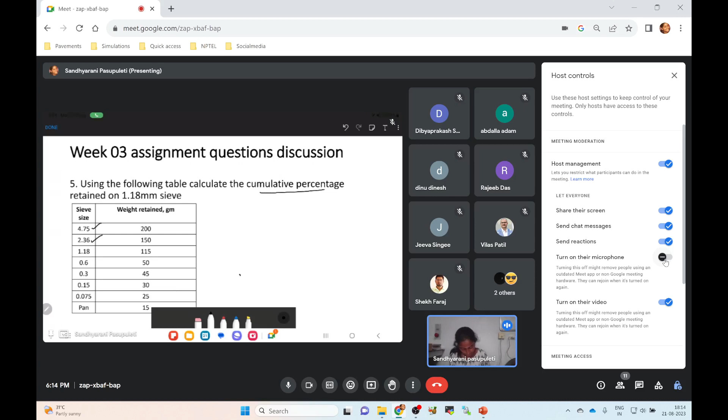If you see the fifth question, this is also a very easy question. Using the following table, calculate the cumulative percentage retained on the 1.18 sieve. So you can see the weight retained on each sieve size is given. We need to calculate the cumulative percentage retained on the 1.18 sieve. So these weights are already given.

Cumulative, how do we get it? For weights retained, 200 is the weight retained. So on 2.36, you know that 200 plus 150 will be 350. On 1.18, it will be the sum of all the weights retained from the top. In the same way, you can calculate the cumulative weights retained.

If you want to calculate the percentage, how do we calculate it? You have to calculate the total weight retained. Then this is the cumulative weight retained. So 200 by the total, 350 by 630. In a similar way you can calculate the cumulative percentages retained. They are asking for the cumulative percentage retained on the 1.18 sieve, which is 73.8%.

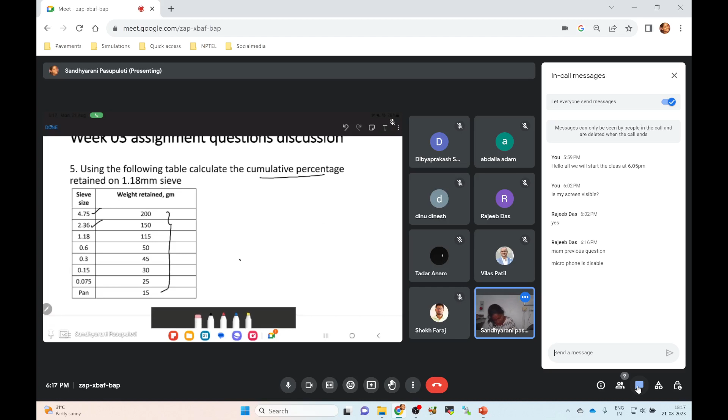So if you can see here, weight retained on 4.75 is given as 200. So cumulative will be 200 only because there is no weight other than 200. If we come to the 2.36, weight retained is 150. So whatever is retained on 2.36 is 150 plus whatever is retained on 4.75, this also will retain on 2.36. So cumulative would be 200 plus 150, 350.

In the similar way, you can do that. The weight retained on 1.18 will be 200 plus 150 plus 115, which is nothing but 465. So if you know the cumulative weights retained, now you have to calculate what is the percentage of cumulative retained. So if you could see, let me erase this.

Okay, to calculate the cumulative retained, let us say here the cumulative retained is 200 divided by the total weight retained, 630, into 100. So this is your 31.7%. In the same way, if you come to the 1.18, what is the cumulative retained? 465 out of 630 into 100, which is nothing but 73.8%.

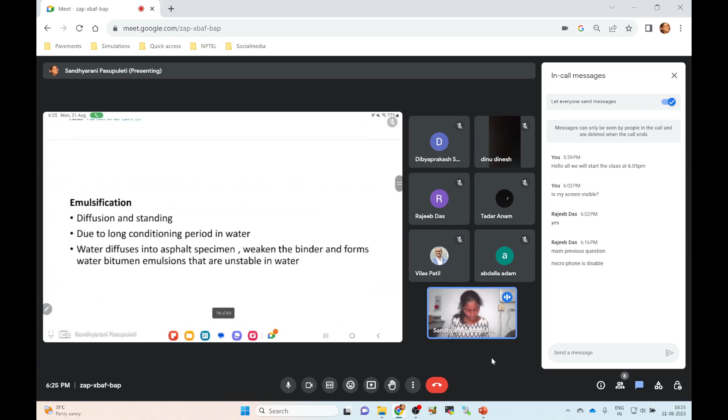And if you take emulsification, let us say this aggregate and bitumen has already been water saturated for so long. So diffusion has already happened and still the pavement is inside the water. Due to the long conditioning period in water, water diffuses into the asphalt specimen. Then it will weaken the binder and form water-bitumen emulsions, which are unstable in water. What is an emulsion usually?

Let us say you have bitumen which is semi-solid in state. If you want to make this semi-solid bitumen a liquid, you will call that an emulsion. Usually how will the bitumen convert to liquid? First, you can increase the temperature so that this semi-solid bitumen is converted into liquid. Instead of increasing the temperature, by adding some liquids you can convert the bitumen into a liquid. Then the bitumen is called an emulsion.

So here what they are saying is, because the bitumen is already saturated within the water for so long, it forms a bitumen emulsion within the water. It is kind of floating in the water. Bitumen in small particles will be floating in the water and the bond with the aggregates will be broken.

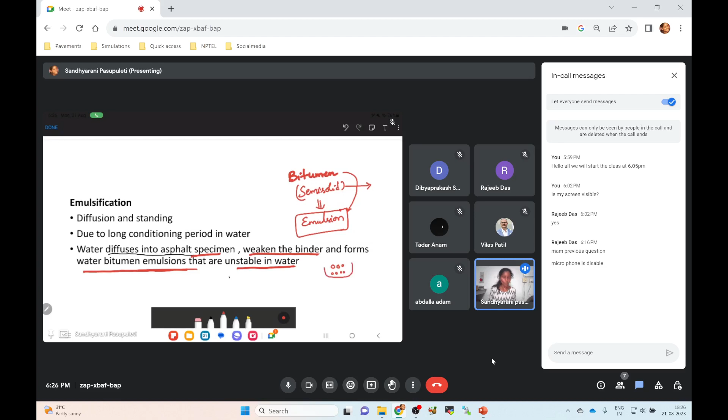So these are two of the mechanisms, and if you take the third mechanism, which is hydraulic scouring, let us say a pavement is already saturated with water. When I say pavement, these are the aggregates, and in between the aggregates there is bitumen. This is the pavement, and it is fully saturated with water. Now there is a vehicle moving over it. That means this vehicle is applying load over the saturated surface.

So what happens when it applies pressure? It can cause some abrasion of the binder from the aggregates and also cause fine aggregates to become loose and dislodged from the pavement. Whatever fine aggregates are here can be dislodged from this compacted surface, or some of the bitumen can be abraded from the mixture. This is due to the applied pressure from the traffic load on the saturated pavement surface. This mechanism is called hydraulic scouring.

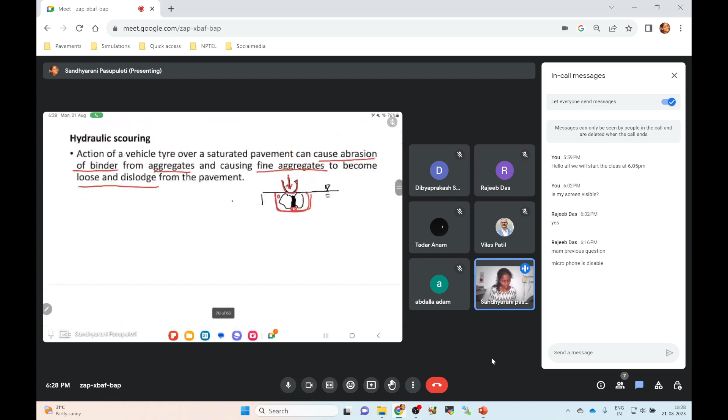There can be another mechanism, which is due to pore pressure. Let us say now I have applied only one wheel load, but there are repeated tire loads from morning to evening. Due to these repeated tire loads, what happens on saturated pavements? Let us say this is the pavement, already saturated, and you are applying a repeated load.

There are aggregates on the sides and at the bottom there will be a subgrade. It is under pressure from the sides and you are also applying load from the top. This internal pressure can cause too much pore pressure and erode the material and bitumen due to the water. This is due to pore pressure. Now let us see what was being asked in the question.

Suction means what? When the load is applied here, let us say higher pressure at the top, lower pressure at the bottom. So the suction is created at the bottom. So this is what is causing the loss of the bitumen from the aggregate. So this mechanism is not displacement and detachment, we know, because there is a moving wheel.

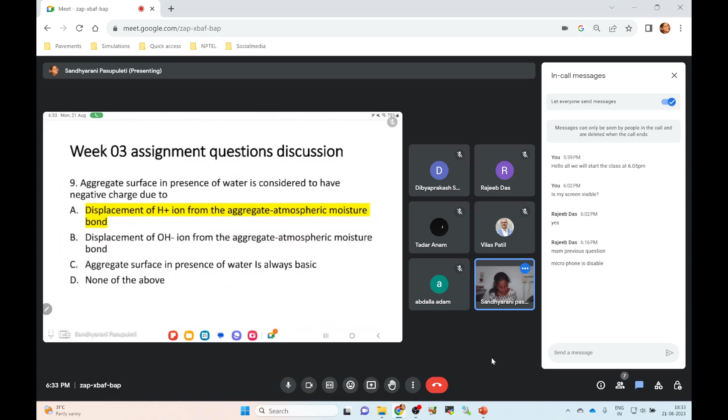Aggregate surface in presence of water is always basic. Definitely not this and not this. So it can be either option A or option B, displacement of H plus ion from the aggregate or the displacement of OH. So you have already seen from the silanol group SiOH, H plus has been taken out, because of which you are getting SiO minus, which is nothing but the negative charge on the aggregate.

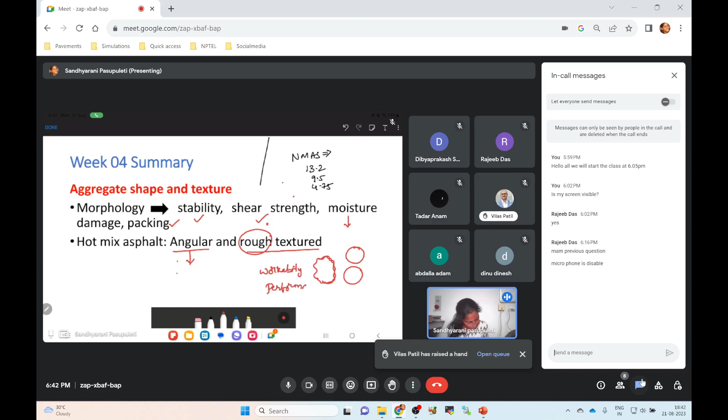But as far as workability is concerned, workability means when I am mixing the aggregate with the bitumen, I should not require more energy to mix. It should be very easy to mix. But with very rough textured aggregates, it is difficult to mix; we need to give more energy. That is the reason why rounded aggregates are suitable for good workability, and rough aggregates are more suitable against moisture damage. But if you choose between workability and the performance of the pavement, we always go for performance. That is why sometimes we compromise on workability and still choose angular and rough textured aggregates.

Okay, if you see the angular aggregates, they give better interlocking, more internal friction and more stability. But if you take the rough textured aggregates, there will be more adhesion. When I say adhesion, that is the bond between aggregate and bitumen. So as far as workability is concerned, angular aggregates have more energy requirement and rounded aggregates have less energy requirement.

But what happens when the rounded aggregates are used? It requires less energy, so with whatever less energy, it gets compacted well. Initially, intentionally, we keep, let us say, 7% of air voids in the pavement, so that when the vehicles start moving, they themselves will be compacting, which is called primary compaction. And after a particular number of years, there will be secondary compaction due to the vehicles.

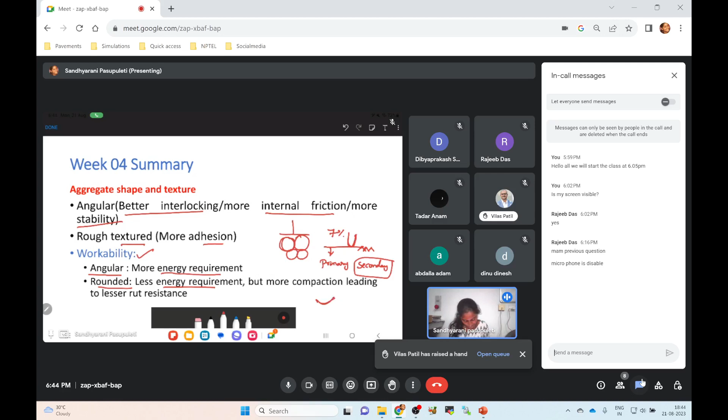But if we use the rounded aggregates, in the initial stages of the pavement itself, it will be in secondary compaction because it has been compacted well. If it is already in secondary compaction, the moment a heavier vehicle load comes, what happens? It will show rutting on the pavement surface. That is one of the reasons why we avoid using rounded aggregates in pavement construction.

And if we consider the dense graded mixes, here I have shown one photo which is BC2 gradation. These are the sizes used in the BC2 gradation, and this is the individual percentage retained. There is nothing retained on 19 mm, but on 13.2 you can see 5% is retained, and on 9.5 something like 16, 17; you can see the values here. But SMA is nothing but a gap graded mixture.

So the difference between SMA and BC2 you can observe is, in BC2 most of the fine particles, let us say less than 4.75, 2.36, 1.18, 600, 300, 150, 75 micron, and the dust, all the percentages are retained. That means you are including all these sizes of materials. But if you come here, a few of the finer sizes will be missing. In addition to that, most of the aggregate contribution is from the coarser aggregates.

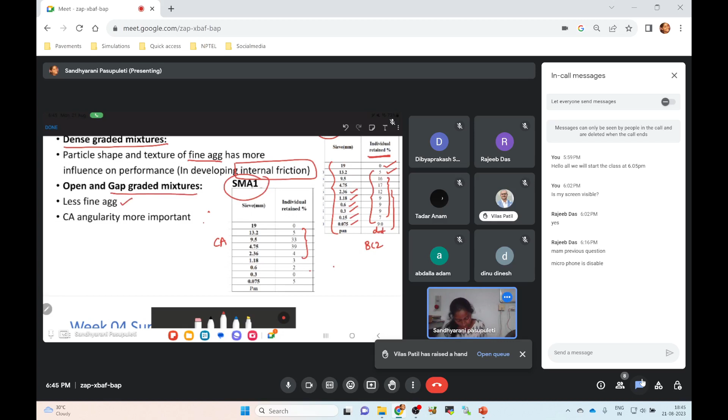So if you want to talk about gap graded mixtures, the angularity of coarse aggregates is sufficient. If you want to talk about dense graded mixes like BC2 or BC1, then you need to think about fine aggregate angularity. So for dense graded, fine aggregate angularity is more important because their amount is more, thereby they develop more internal friction. For open and gap graded mixtures, fewer fine aggregates and more coarse aggregates are there, so the angularity of coarse aggregates is more important.

Though we do not have particular methods to determine the angularity of fine aggregates in India, for coarse aggregates we do have the methods. In addition to that, one of the most important tests is shape characteristics, flakiness and elongation. This test might be very easy to perform, but if we have more flaky and elongated particles in the mixtures, it really changes all your volumetrics, your optimum bitumen content, and your performance in the field will be completely different from the lab.

So for flakiness index, you can see here there are two apparatus. This is used to determine the flakiness. When I say flaky, if we have an aggregate like this, how flat it is. This is the length; when I say flat, the thickness, how thin it is. We do not want the metal to be very thin because if they are very thin, they will be broken. So we try to pass them through this gap. If they pass through this gap from top to bottom, they are very thin. These are the slots provided to check, each slot for each size.

Let us say this slot will be written as 63 to 50. That means the thickness T will be (63 plus 50) by 2 into 0.6, as I mentioned, 0.6 times the average size. In this slot, if your individual aggregate is passing, you can say my aggregate is very flat, very thin. Like that, we have to separate all the aggregates corresponding to their sizes, then pass them through this. Whatever is passing, we call flaky aggregates. Whatever is not passing, we call non-flaky aggregates. So what is the problem with these flaky aggregates? Why can't I use them?

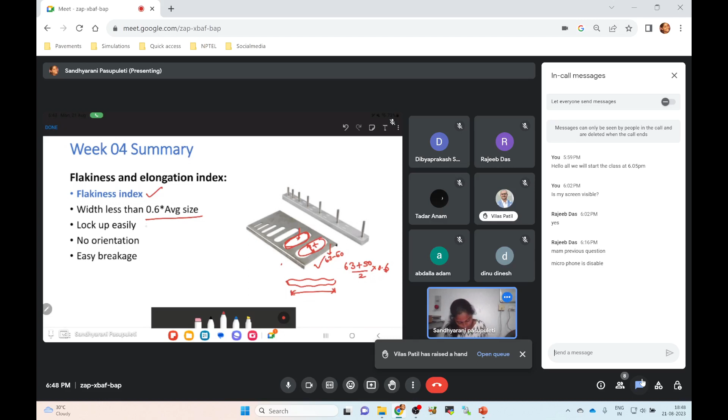First thing is, if I have 3-4 flaky aggregates, let us say mixed with bitumen, and now you have applied some vertical load from top. The moment you apply load, they just get compacted like that. They will not reorient or be dislocated. They will just compact as it is. They lock up very easily. There won't be any orientation.

But we need a better orientation to fill the gaps. Let us say you have a single aggregate here and it has 5 or 6 aggregates in contact. If a wheel load of, let us say, 20 kilonewtons comes from top, this load will be shared by 1, 2, 3, 4, 5, 6 aggregates. Because all these are in contact, the load can be shared by 6 aggregates. If there is no proper contact, this 20 kilonewtons should be shared by either 2 or 3. Then, because 3 aggregates are sharing more load, they will be broken very easily.

So having no orientation and locking up very easily is a main problem. In addition to that, because they are very flat and very thin, when the load is applied, they can be broken very easily. The same is the disadvantage for elongated materials also. You can see this is the elongation gauge. Here it will be written 63-50, and this length will be 1.8 into 63 plus 50 by 2. So we take each individual aggregate and try to place it here.

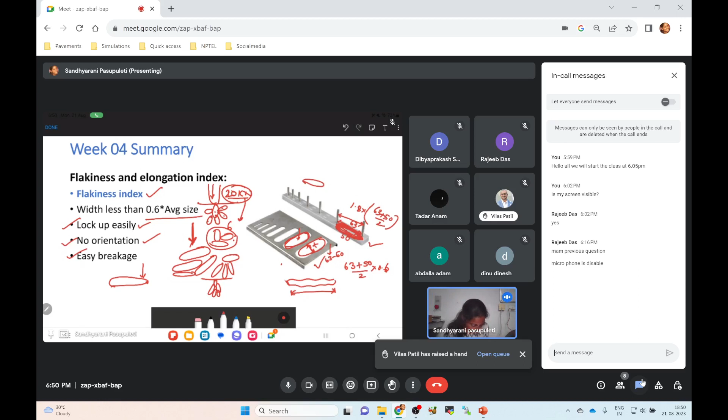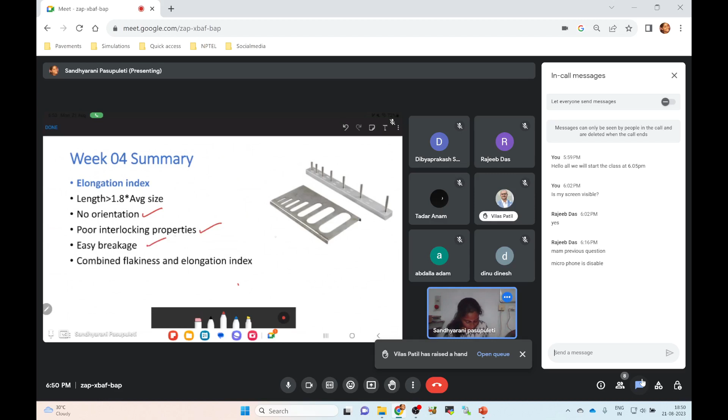If this aggregate is stopped here, that means its length is more than the slot provided. That means it is an elongated aggregate. We do not want the aggregates to be very long, because of the same disadvantage. They will not be oriented properly, they will lock up easily, and they will tend to break very easily. So this length would be greater than 1.8. No proper orientation, poor interlocking, easy breakage. So we calculate the flakiness index and elongation index separately, then we combine them and call that the combined flakiness and elongation index. This is what we do in India according to IS 2386.

But as far as the American standards are concerned, you can see here the aggregate. Any aggregate will have length, width and thickness. This is the length, this is the thickness and this is the width. Based on the ratio of width to thickness, length to width and length to thickness, by considering any two dimensions, you can calculate flat aggregates. If I have 200 pieces of aggregates, which are only flat, which are only elongated, or which are both flat and elongated can be determined.

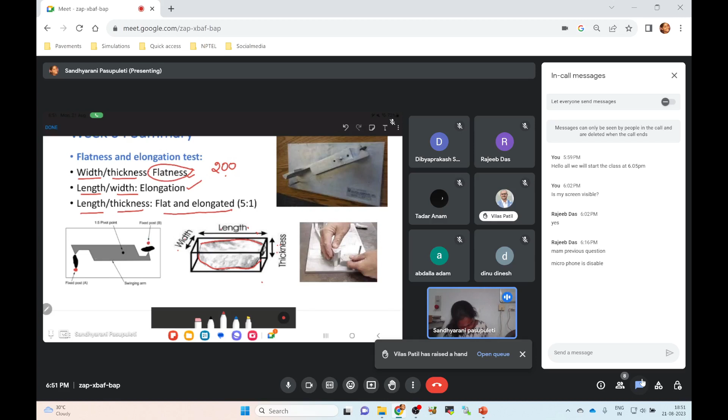How do we determine? This is the apparatus here. This is fixed, like a screw, and this is also a fixed screw. Here the gap would always be more, and here the gap will be small. Initially we take one aggregate. This is the length of the aggregate, so I keep my aggregate along the length side. This is a moving arm; you can move and rotate it. When you fix the length here, a particular gap will be formed.

Immediately, without disturbing this position, you take this aggregate out and try to pass it along the thickness direction. If it passes through, this aggregate is called both flat and elongated. So length to thickness is 5:1. That means if I have taken one aggregate whose length is 5 mm and thickness is 1 mm, the length is 5 times the thickness. Any aggregate having length 5 times the thickness is called both flat and elongated according to the American standards.

In that process you can still calculate only flat aggregates or only elongated aggregates, but this is one way to calculate both flat and elongated at a time. If you want to calculate only flat: here I have fixed along the length, right? Usually you should not fix along the length. You have to fix the aggregate along the width. So after fixing here along the width, let me erase this.

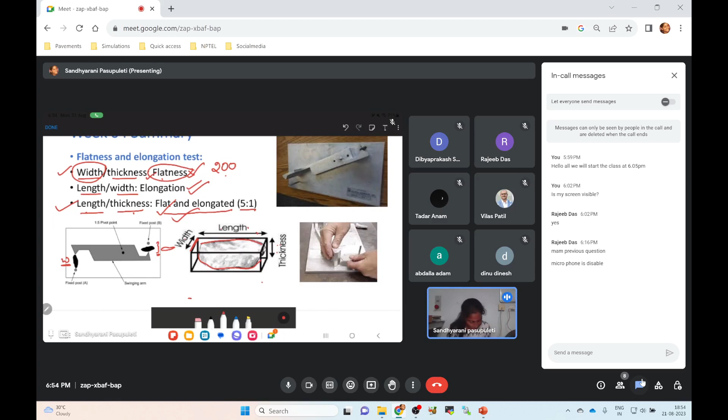So we will mostly not be doing this, but we still have this apparatus at IIT Kharagpur. We do it for laboratory purposes, but still in India, as far as the preliminary tests are concerned, we do it according to IS 2386 for flakiness and elongation.

And in addition to that, we have the angularity test. As we have discussed already, for dense graded mixes, the angularity requirement is different. For gap graded and open graded, angularity is different. How do we actually determine the angularity of any aggregates? One of the basic theories is, if you have rounded aggregates and you arrange them in any volume, that volume can be 200 cubic centimeters or 2000, whatever. Let us say I have a box here. I have filled the entire box with rounded aggregates.

Anytime you place rounded aggregates and fill, the amount of air voids or gaps formed by those rounded aggregates would always be 33%. So if your voids are more than 33%, let us say 35%, that means all of your aggregates are not rounded. There must be some aggregates which are not rounded. Let us say here the difference is 2%. That means there are extra air voids of 2%. That must be because of the angular aggregates present, because angular aggregates give more air voids than rounded aggregates.

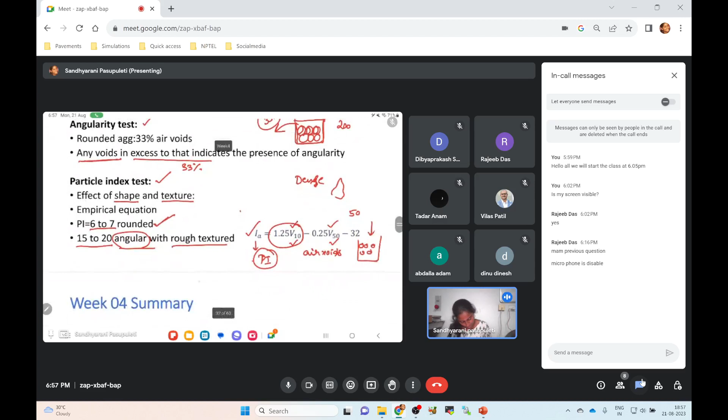So you can see the values here. What we can understand is, if the particle index value is 6 to 7, that means air voids are lesser, and lesser air voids means that is a rounded aggregate. If the particle index value increases to 15 to 20, that means more air voids are there. That means the aggregate could be angular or rough textured. So that's how, based on the particle index, we can say whether the given aggregates are round or angular.

Another important property of the aggregate is surface area. This surface area is always useful to calculate the bitumen film thickness. Why we need to understand the bitumen film thickness, we will understand when we move to volumetrics in upcoming lectures. Let us say you have already designed the mix, you have aggregate. Around this aggregate, there must be bitumen coated. This coating of bitumen is different in dense graded mixtures.

If you take the same aggregate in gap or open graded mixes, you can see there will be more thickness around the aggregate. The advantage of higher thickness is that when water comes into contact, it cannot break the bond between the aggregate and bitumen. Thereby moisture damage can be avoided. So to avoid moisture damage, we always prefer higher film thickness. But bitumen is not a cheap material, it is a costly material. So just because it gives higher moisture resistance, we cannot keep adding bitumen. We need to have a sufficient amount of bitumen.

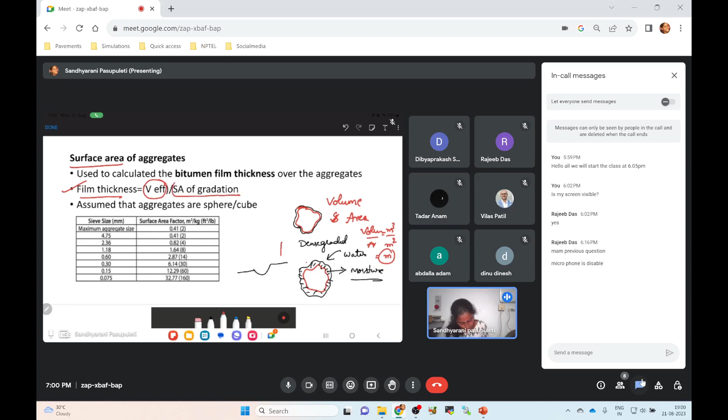So to calculate the film thickness, you need the volume of the bitumen. This volume is actually coated over the aggregate surface. So the surface area of aggregate is required, and the volume of bitumen that is being added. How to calculate this bitumen volume you will understand in the upcoming lectures. Let us say somebody has given the bitumen volume. Now you have to calculate the surface area of the aggregate. Then you can calculate the film thickness.

So you can see these are the set of surface area factors. How to calculate this surface area?

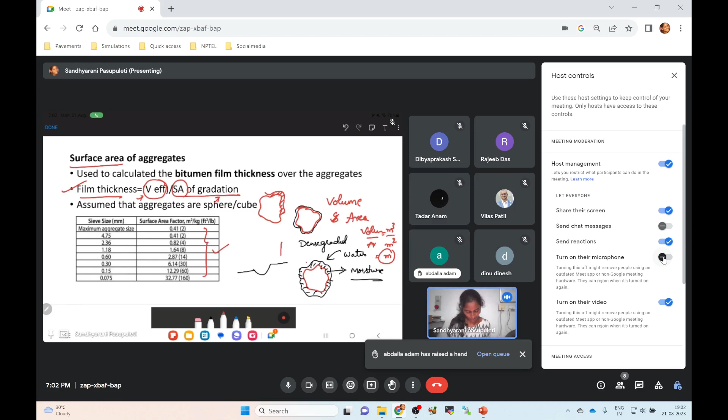So if you could see here, these are the surface area factors. I will explain what a surface area factor is and how to usually calculate it. As far as the surface area calculation is concerned, you need to know only the surface area of a sphere and a cube, because we assume that the aggregates are either spherical or cubical in shape.

So how to calculate the surface area factor: let us say now we have an individual aggregate. We know that specific gravity is density of the material by density of water. Let us say density of water is 1, so I am not considering it. So whatever is at the top will be density of the material. Density is nothing but weight by volume.

So if you want to calculate the surface area of an individual aggregate, when I say area, how do we get it? From the specific gravity, weight by volume. So let me bring this volume to this side. Then you have weight by specific gravity. Volume can be written as area into diameter, because we are assuming spherical or cubical. So weight by G. Now you need specific surface area, so weight by G into D. That is how you got this formula of weight by specific gravity into D. So this is for an individual aggregate.

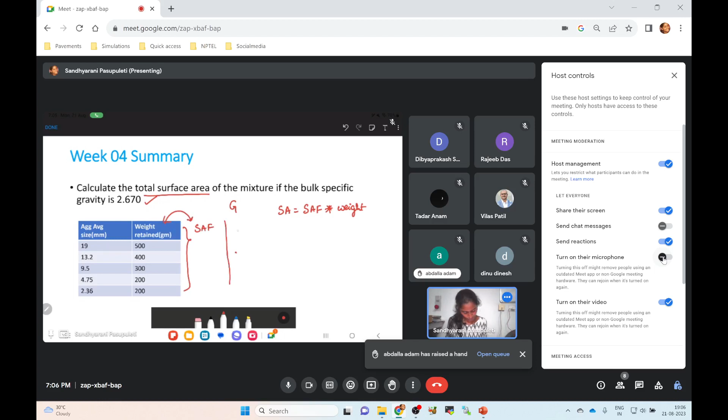So calculate the total surface area of the mixture if the bulk specific gravity is 2.670. So G has been given. To calculate the surface area, first you have to calculate the surface area factor, then you have to multiply it with the weight of the aggregates. The weight of the aggregates is already given. So first you need to calculate the surface area factor, then multiply these two. Then you will get the surface area of each aggregate. Then you can add all of them to get the total surface area.

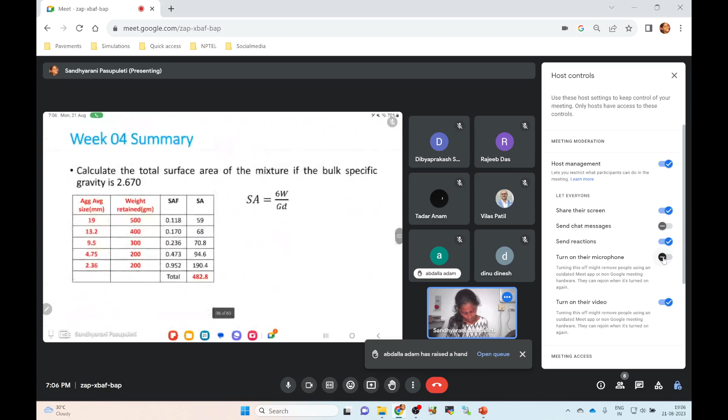Okay, you can see here. So how to calculate this surface area factor? This is already given. I have told this is meter square per kg. That means surface area of that particle out of the total kg. So from the previous equation, surface area is already known. So you can use the surface area of a sphere or cube, because for both of them the ratio will be the same.

Pi d square is the surface area. Pi d cube by 6 will be the volume. So this is the area by volume. So how much you will get? 6 by d. Okay. Pi will be cancelled. So this is 6 by d.

So now if you want meter square per kg. Okay. So from this specific gravity, you know weight by volume. So if you take the specific gravity to this side, volume equal to weight by specific gravity. Let me write specific gravity as G always, weight by G. So in this area by volume, instead of this volume, I will substitute this W by G. So you can take this to this side. Finally, you will get 6W by GD.

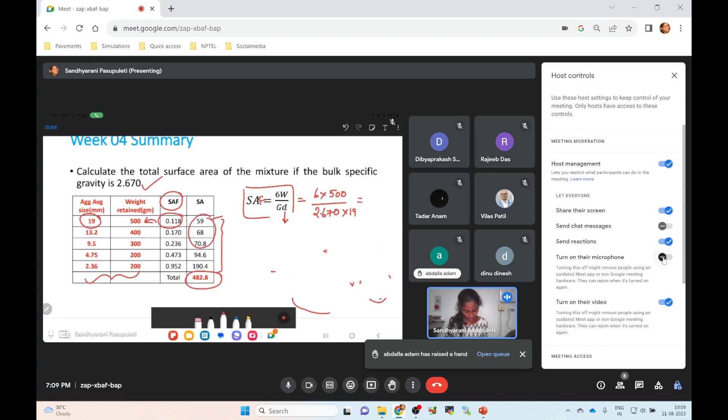6 into, what is the weight? 500, divided by G, which is given in the question, 2.670, into D, means size. What is the size? 19. So if you calculate that, you will get the surface area factor. You can multiply with this weight, you will get the total surface area. So if you calculate all the surface areas and add them, that is the total surface area. So in problems they may ask you to do it for 3 sizes or 2 sizes, they can give anything.

And the next important preliminary test is aggregate impact test. So when I say impact, I am applying a sudden load onto the pavement. It can be aggregate or a combination of aggregate or mixture, because here we are going to check the quality of aggregate. So when I apply the sudden impact load, that energy will be absorbed by the aggregates. Some aggregates will break into small pieces because they are not tough enough. If they are tough enough, they will not be broken into small pieces. So this impact test is to understand the toughness of the material and how resistant they are to degradation.

So what do we do? We take the aggregates passing 12.5 mm and retained on 10 mm. Then we apply 15 blows on that. After that you can see there are small pieces degraded. So you take the 2.36 mm sieve, and all these small pieces will be sieved. Whatever dust is there will pass. Whatever is bigger than 2.36 will be retained. So now we calculate this amount. Let us say I have taken 500 grams and 200 grams is passing, then 200 by 500 into 100. So 40% is my aggregate impact value.

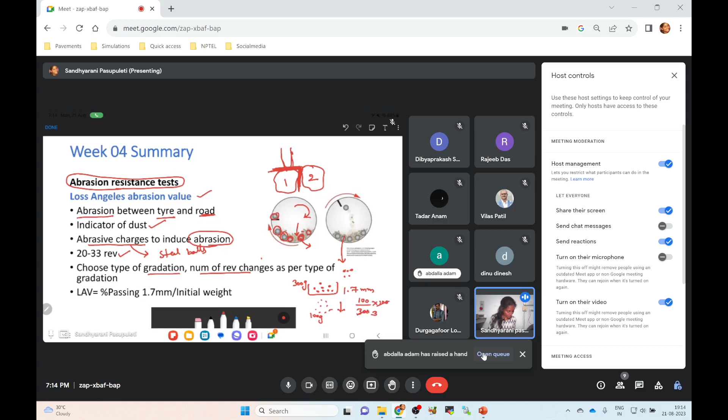Then what happens? After doing that, a lot of aggregate will become small pieces or dust. Then you take a 1.7 mm sieve, put all the material here and sieve. There will be some dust passing below. So let us say again, you have taken 300 grams and 100 grams has passed. That means 100 by 300 into 100, around 33% is your Los Angeles abrasion value. So here also we want the value to be as low as possible. Okay.

So if you have aggregates of different sizes with you, now you don't know on which sizes you have to perform this test. If you choose A, they tell you to choose a 40 mm sieve and a 25 mm sieve, and pass the material. So they should pass through 40 and they should be retained on 25. Like that you take around 1.2 kg.

In the same way, next time you take a 25 mm sieve and a 20 mm sieve, pass the material from 25, and some material will be retained on 20. Like that you collect around 1.2 kg. In the same way, 20 to 12.5, 12.5 to 10. So these four combinations of 1.2 kg each you take. Along with that, you add the steel balls. Then you do 20 to 33 revolutions per minute.

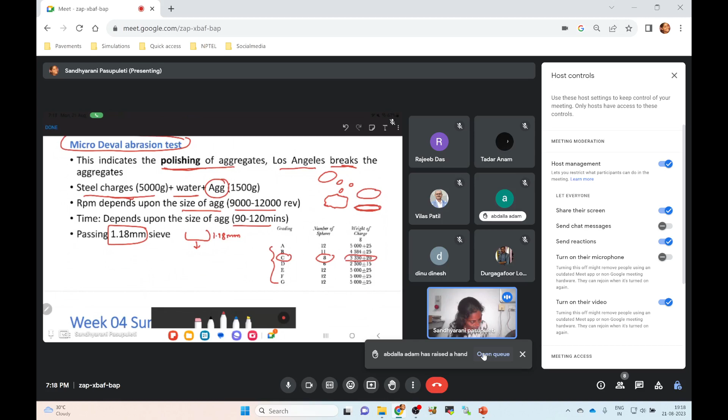And as I told, you have to select a type of gradation. If you select, let us say, gradation C, then you have to select 8 steel balls, and those 8 steel balls' weight will be around 3330 plus or minus 20.

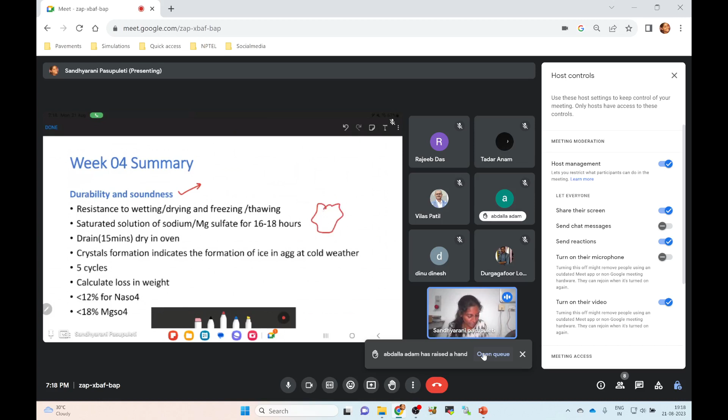So in addition to that, there is another test which is nothing but the durability and soundness. This test is actually useful if you want to understand the moisture damage of the aggregates. Durability and soundness: if you buy any material, how durable it will be under the action of water. Let us say here the material is aggregate. When the aggregate is subjected to so much water, how many days it can withstand the traffic load. So this is to understand the resistance to wetting and drying.

Sometimes it can be rainy season, after that it can be summer, again it will be rainy season, and in colder regions it can be freezing and thawing. Under these conditions, how resistant the aggregates are, to understand that we do this durability and soundness test. What do we do for that? We have to create one solution. Why do we prepare a solution? Because now you have an aggregate.

You want to artificially degrade this aggregate. So you need to find a solution. When I say solution, that means chemical solution. If you put the aggregate into the solution, this aggregate has to degrade. It has to get dissolved. Like that you have to prepare some solution. Here sodium sulfate or magnesium sulfate is that kind of solution. So we keep the aggregates in the solution for around 16 to 18 hours.

After 18 hours, I will take the aggregates out. I will take a sieve, then I will drain. All the solution will pass out, only aggregates will be here. Then I will keep these aggregates in the oven. So what am I doing here? When I am keeping the aggregates in solution, I am wetting the aggregates. When I am keeping the aggregates in the oven, I am drying the aggregates. So this wetting and drying action I am artificially simulating in the laboratory.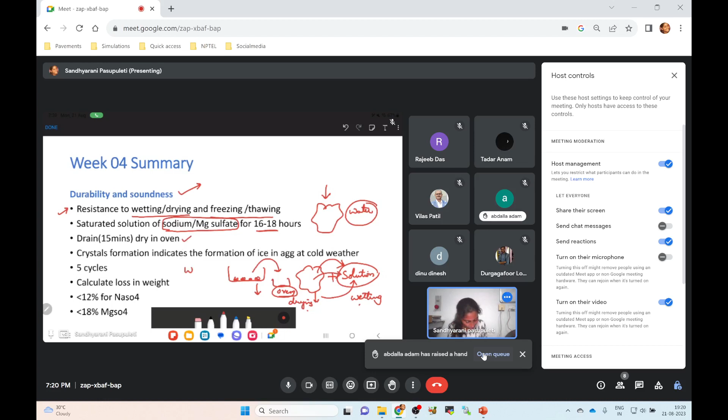After keeping them in the oven, I will take them out and take the weight. There must be some initial weight. After this wetting and drying, the weight will be decreased or changed. What is the change in weight? That I will observe, let us say, the first time. Again, from the oven, I will take the material, keep it in the solution, then again after 16 to 18 hours, I will take it out, drain it on the sieve, keep it in the oven, and again take the weight. Like that I have to repeat for around 5 cycles. Then the loss in weight after these 5 cycles is what we have to calculate.

You can either use sodium sulfate or magnesium sulfate. If you use sodium sulfate, you must calculate the loss in weight. Let us say initially it is 100 grams. After 5 cycles, it has become 80 grams. That means 20 grams is less, so 20% is the loss. The loss should always be less than 12% for sodium sulfate and less than 18% for magnesium sulfate, depending upon the type of solution you are using.

But as far as this experiment is concerned, you are taking the aggregate, keeping it in the solution, and seeing whether it can be dissolved or not. But why do we do this mainly? If you see colder regions like Jammu Kashmir, what happens? Let us say there are aggregates. In the rainy season, some water enters these aggregates. Then suddenly, due to the cold weather, this water converts into snow or ice. So it becomes very stiff.

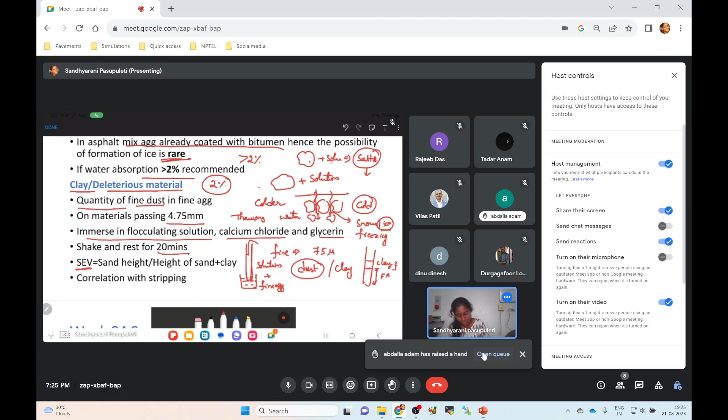So this test is usually to understand the quality of the clay. In addition to the sand equivalent test, you can also perform liquid limit and plastic limit. This we already know, right? How to perform liquid limit and plastic limit tests on soils, which we have already discussed. This is actually on 425 micron passing sieve. So this is a measure of plasticity of the clay. We recommend that this plasticity should always be less than 4.

In addition to that, there is another test called the methylene blue test. This is a more reliable test. Let us say you have 10 grams of sample. Initially you have to prepare some suspension. If you have a soil, you cannot use it directly as a solid soil, so you add some distilled water. 10 grams of soil, 30 grams of distilled water. Now you call that a suspension. That means in the distilled water, your soil is floating like this.

Second thing, you have to prepare a solution. Methylene blue is a chemical, let us say. You add distilled water to that and prepare 200 ml of that solution. Now you have 200 ml of methylene blue and you have a soil suspension. Now what you have to do is, this is your soil suspension, you start adding this methylene blue solution, 0.5 ml initially. This is called the titration process.

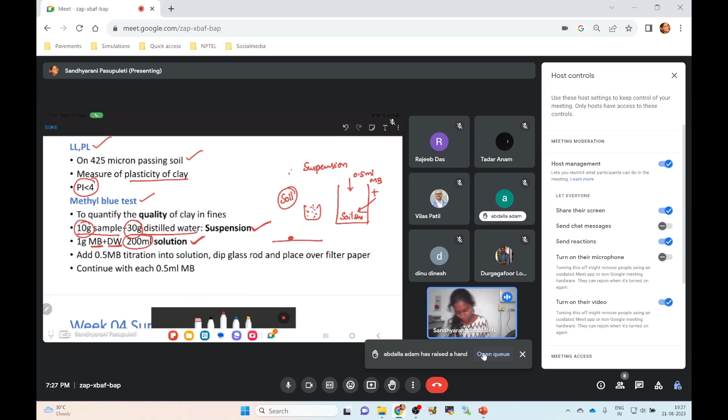When you add 0.5 ml, this methylene blue will interact with the soil suspension. Now take one drop of that and place it on a filter paper. I will show the picture in the next slide. Let us say like this, you place a drop here. Then again add another 0.5 ml of methylene blue, again take a drop and put it on the filter paper. Like that you keep adding 0.5 ml each time.

What you will observe is initially there will be only a dark brown circle. As the amount of methylene blue added increases, you will see that around this dark brown there will be a blue color circle formed. That implies the methylene blue is interacting with the existing soil suspension. Initially, whatever methylene blue you have added is not sufficient; that's why the blue circle is not formed. When you see this blue circle, you can stop the test.

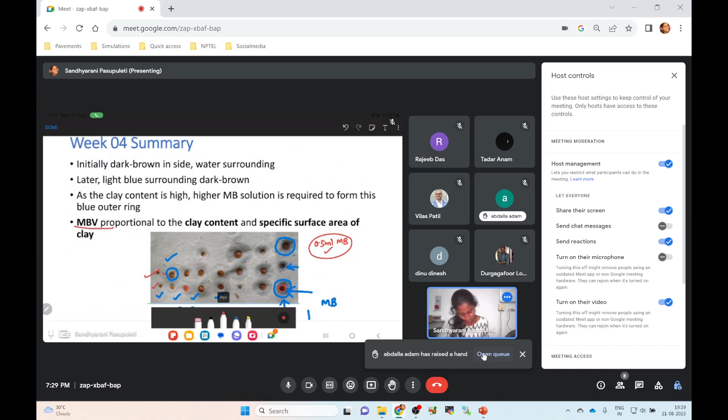So if, in order to see this blue circle, you have to add too much methylene blue, that means there is a lot of clay present. If you could see this blue circle here itself, with just 0.5 ml of methylene blue, that means the clay content is very low, which means good quality. So this methylene blue value is proportional to the clay content and the specific surface area of the clay.

So after conducting the experiment, a lower methylene blue value is desirable, let us say 5 to 6. If we have more than 20, that means that is a failed condition of the soil. We are not supposed to use that one. And it is an indicator of moisture susceptibility.

So if we have an aggregate with a lot of dust around it, it will not allow your bitumen to coat properly. When there is no proper coating, what happens? When water comes into contact, it is very easy for the water to remove the bitumen from the aggregate surface, which is nothing but moisture damage. We need to avoid that.

And the most important is specific gravity. Most people might already know about this. To calculate the specific gravity of any material, it is the density of that material divided by the density of water. So how heavy is the material in comparison with water? Simply, if specific gravity is 2.72, my material is 2.72 times heavier than water.

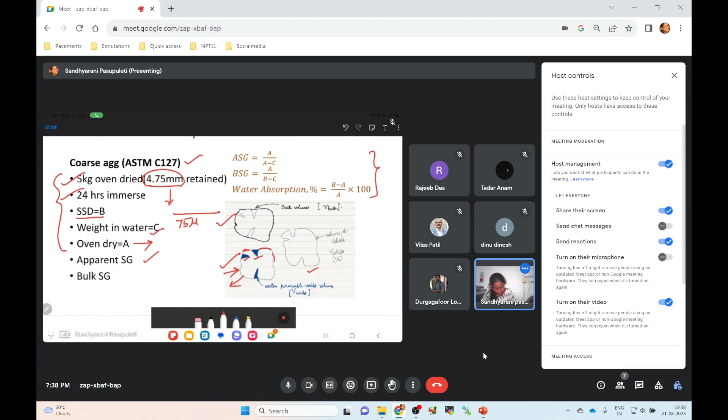But as far as fine aggregates are concerned, it is not that easy to calculate the specific gravity. Why? Let us say you have fine aggregate this. This is normal weight, dry weight. So dry weight is easy to calculate. Okay. I have already soaked them in the water for 24 hours, let us say. Now I will take a towel or a filter paper. I will wipe these fine aggregates.

As I am keeping them as separate individual particles, but fine aggregates, let us say, of 150, 300, sorry, below 1.18, 600, 300 and 75 micron. These sizes are not like individual particles. They look like some dust kind of powder. So you cannot wipe them with some cloth or paper or towel. That is impossible. In coarse aggregates, it is very easy to wipe. If you cannot wipe properly, then you cannot calculate your saturated surface dry.

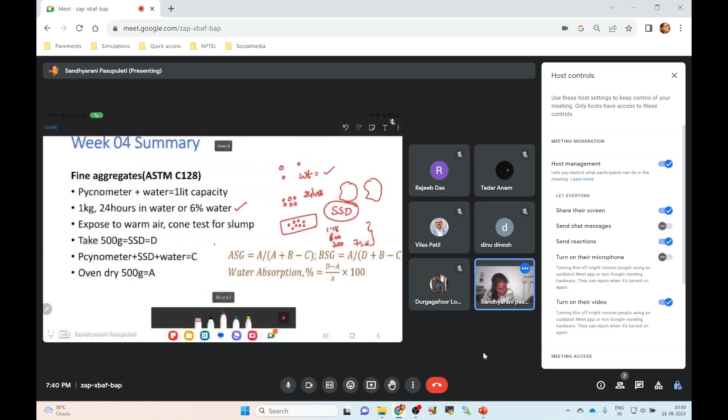So how do we say what is the saturated surface dry weight for fine aggregate? That is the difficulty everybody faces in the laboratory to calculate the specific gravity of fine aggregates. So for that, each person has their own way of calculating SSD. As far as the standard is concerned, if you have 1 kg of material and you soak it for 24 hours in water, then you can say that they have absorbed all the water. Now you have to take that amount from the soaked aggregates.

You have to expose them to some warm air. It should not be very warm. The aggregate should not be very dry. It still looks moist, but it should be dry. How do we know that? There will be a cone test, just like a concrete slump test. So you fill the fine aggregates into this cone, you apply a few blows, then you remove this cone.

After removing the cone, your material should not be exactly like a cone shape. There should be some slump. It should fall off. That means it is in the SSD condition. If it is in that condition, take the weight, then that is called SSD weight. Then pycnometer plus SSD plus water weight. Then oven dry that SSD sample and calculate that. So the formula will be given.

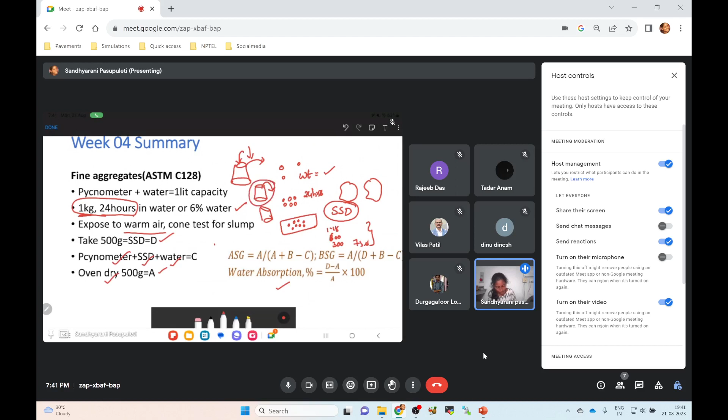Here the only difficulty which we face is using this cone. How do we finalize this condition? Because each person at different stages feels like it is in SSD condition. If anything goes wrong, specific gravity has a very big effect on your volumetrics. So it causes a lot of changes in the volumetrics.

There is one question. It is a very quick question. So what was asked in the question? There is a stockpile A, stockpile B and C. In stockpile A, there are 70% coarse aggregates and the specific gravity is given. And in stockpile B, 50% coarse aggregates are there and 10% fine aggregates are there.

Specific gravities are given. And in the stockpile C, only coarse aggregates are there of 30% and specific gravity is given. So I am taking final aggregates 30% from the stock A, 30% from the stock B, 40% from the stock C. So what is the final specific gravity? I have to calculate. Let us see.

So because stockpile A has only coarse aggregates, let me calculate the bulk specific gravity of stockpile A. How do we calculate? The formula is 100 by 70 by 2.720. You will get the specific gravity of stock A.

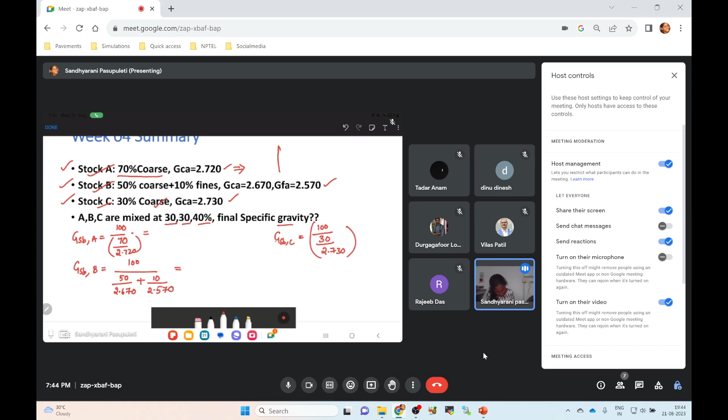And then as far as stockpile C is concerned, we have 100 by 30 by 2.730. Okay. So now we have a specific gravity for stock A, stock B and stock C. If we want final specific gravity, so stock A this much is the specific gravity, B this much, C is this much.

If we talk about the filler, these are called the density bottles. To calculate the specific gravity of filler material which is passing 75 micron, we usually use a density bottle. Calculating the saturated surface dry weight of this filler is extremely difficult, so we calculate the apparent specific gravity. Apparent specific gravity is completely easy. It is exactly like cement or soil. According to American standards or IS standards also we can calculate. So there is no new process.

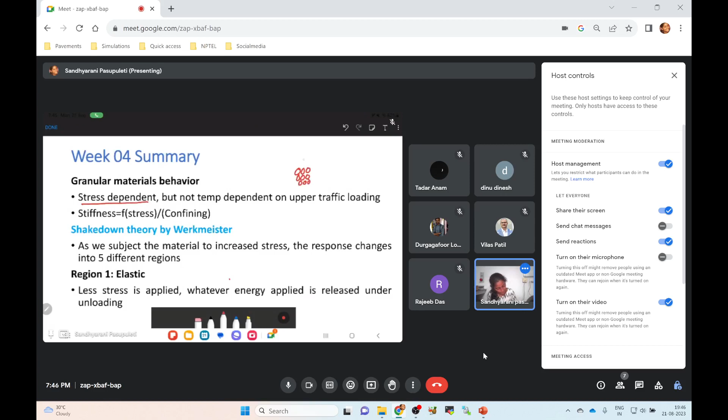And the important discussion is on the behavior of granular materials. Granular materials are stress dependent. That means if we have aggregates, these aggregates are individual particles. So when I apply a wheel load from the top, how these aggregates respond depends upon the pressure from the side and the bottom. If there is no pressure from the sides, these aggregates will be deformed very quickly. If there is pressure from the sides, they will not be deformed that quickly. That means they are stress dependent.

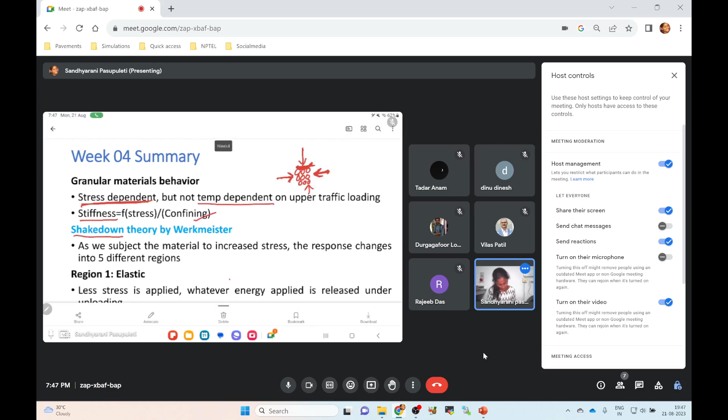They are not that much temperature dependent like bitumen. Bitumen, if you increase the temperature, becomes very soft. But aggregates, if you see any stones on the road, are not going to change their shape just because you increase the temperature. So their stiffness, aggregate stiffness, is a function of stress, especially the confining stress. The behavior of these aggregates is explained by the shakedown theory. Let me take this graph and explain. If you understand this, all the regions will be understood.

So let us say you have aggregates and a wheel load is applied from the top. Initially my load is very less, let us say 20 kilonewtons. When I apply the load, the vehicle has moved. So for 5 seconds the load is applied. After that what happens? When the load is applied, aggregates might have deformed a little. Immediately after 5 seconds, they will come to the original position, because the load application time is very short and the load applied is also very less.

So that stage is called the elastic stage. That means the load path in loading is the same in the return, so there is no energy loss. This state is called elastic. Now I am applying 40 kilonewtons load. That means I am increasing the stress, increasing the load. What happens then? Let us say this is the load applied. When I release the load, it is not following the same path. It is not returning.

It is not following the same path. What is happening? It is returning on a different path. That means there is a gap. This gap indicates that there is a deformation in the material. So it is coming onto a different path.

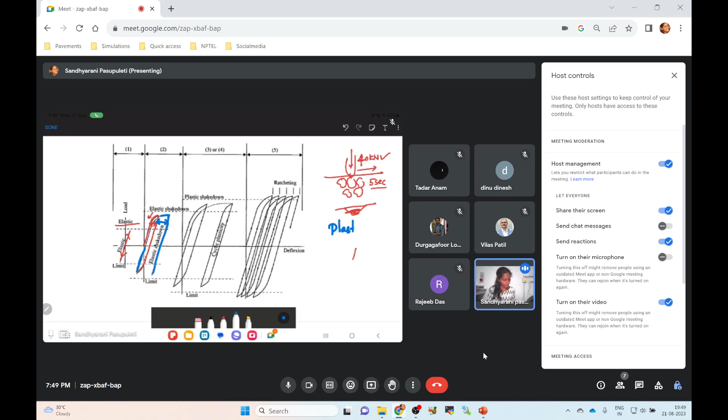So if you keep on increasing the load, let us say to 100 kilonewton, for 1 month, this plastic strain may increase, but it will reach a certain stage beyond which it will not increase, because all the strain that has to occur has come. So this plastic strain from then onwards will become constant.

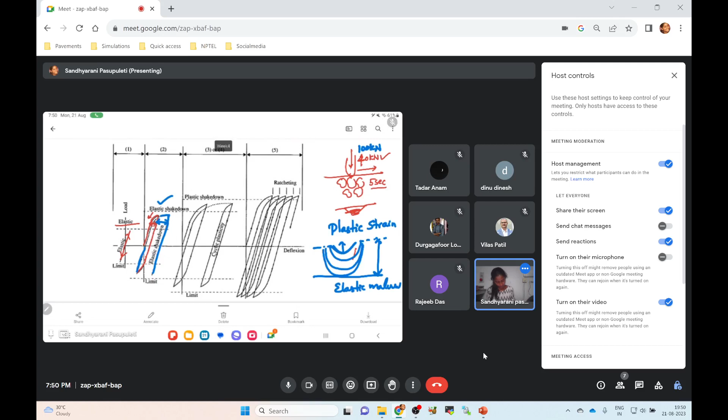After that what happens? If I still apply more load, it will start behaving as an elastic material. Okay. So this stage is called elastic shakedown. So after a particular limit it will again behave as elastic. If you could see here, region 1 is elastic. Here we have applied very less stress. Whatever energy we have applied is released under unloading.

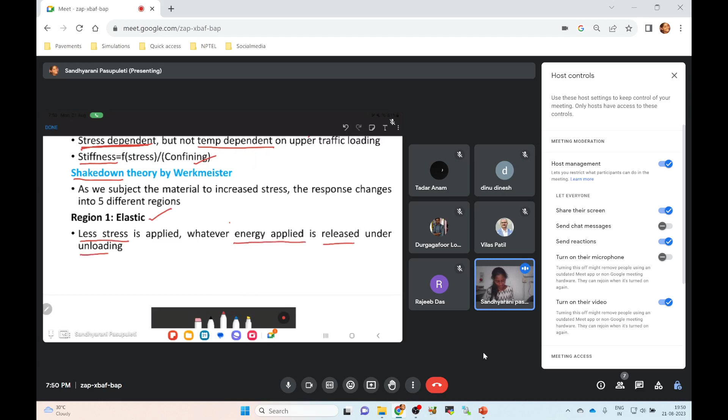And if you come to the second stage, which is nothing but elastic shakedown, here the load we have increased further, then particles have tried to adjust among themselves, deformation is observed, and plastic strain starts to accumulate. So after a particular number of cycles, plastic strain will remain constant, then the material will start acting as elastic.

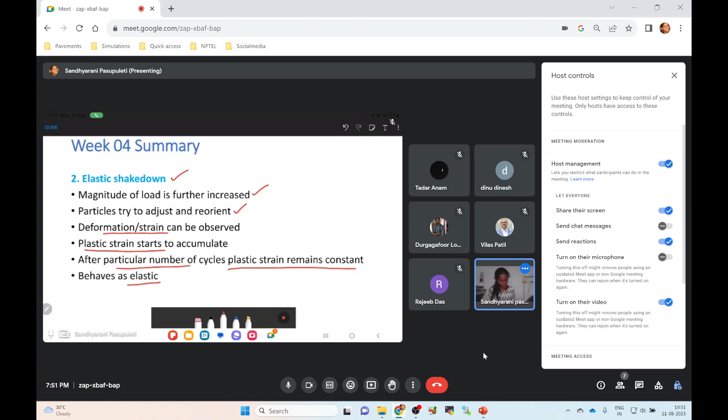So there is a third stage. That means I have further increased the load. What happens if we further increase load? Previously they used to adjust together, they used to compact. But now if I still increase the load, they are subjected to a low level of abrasion because there is no space now. So they will be rubbing each other. That is called abrasion. So there will be a little loss in the material because they will crush each other.

It will happen for a particular number of cycles, let us say 10 vehicles, 20 vehicles. But after 100 vehicles, what happens? Again, this will become constant. Then it will start behaving as elastic in nature.

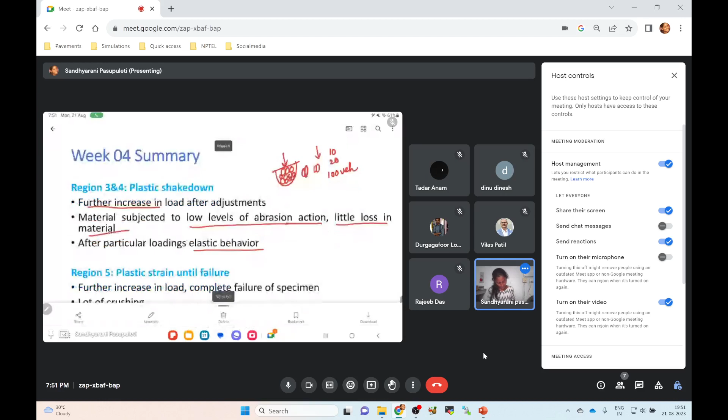Then in the last stage, if I further increase the load, now there is no chance that it can take it. Their abrasion has also started, material has started coming out. If you further increase the load, there will be complete failure of the specimen or a lot of crushing. This stage is called plastic strain until failure. So these are the 5 stages you can see here. This is the final stage.

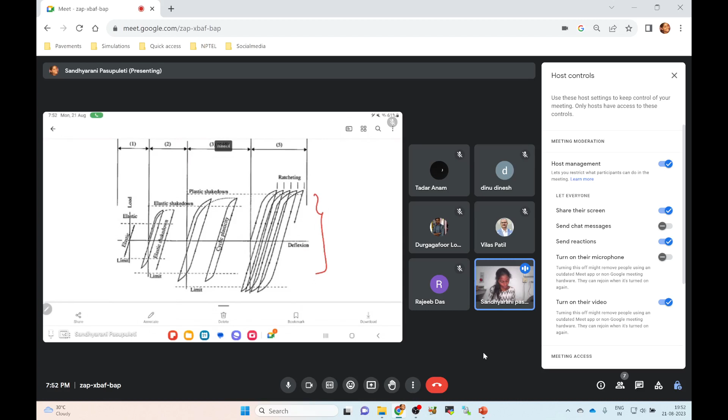So this is a very complex behavior. These stages are very complex in nature. But take the first 2 regions. If I apply a load, strain starts increasing. There will be a plastic strain. After a particular number of load cycles, this plastic strain becomes constant. So after this number of cycles, the material starts to behave as elastic.

In the other region, there will be more strain, but after a particular number of cycles again it will start acting as elastic. But in regions 4 and 5 it will keep on increasing, and in region 5 the material will actually fail. Understanding and analyzing these two regions is very complex. That is the reason why we always assume our material is in region 2 and 3. That means for granular materials, we assume they will behave as elastic after a particular number of cycles. Based on this concept, we will be calculating its modulus value also.

Okay. If you see here, let us say there is a specimen. This is the specimen.

There is a confining pressure from the sides. From the top, we are applying some vertical pressure. Load is applied once. You will not stop; you will give some rest. Again, you will apply. So this is called repeated triaxial. So you will keep on applying.

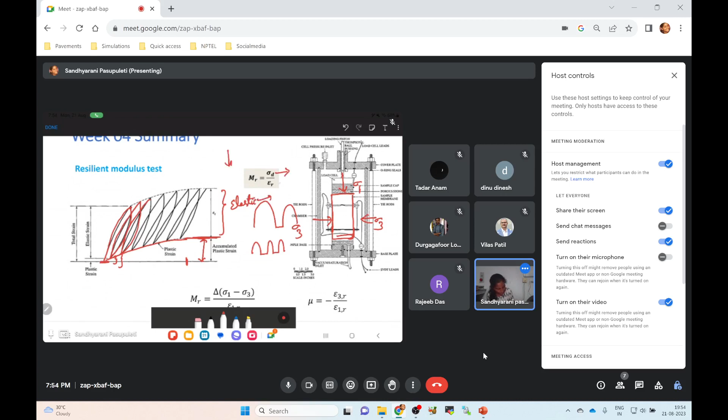So this is what is called elastic strain. You know the applied load; that is called the stress, deviatoric stress. You know this strain, recoverable strain. So modulus is always stress by strain. So this is what is called resilient modulus.

How do we arrive at these three models? Let me give a quick overview. We will be performing the repeated triaxial test. Let us say you have taken a specimen of height h. Initially you will take 20 confining pressure. That means horizontally you are applying 20 pounds per square inch, this much sigma 3. Then you will apply some deviatoric stress. When you apply this 20 lateral and a deviatoric stress, what is the deformation?